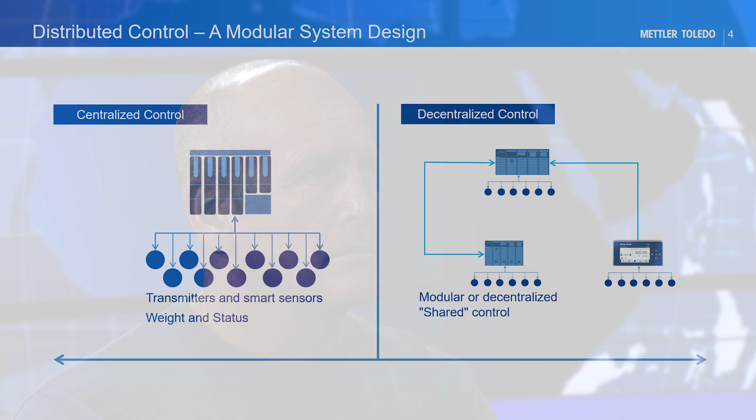Today we're here to talk about distributed control in factory automation with Bram Scheidegger. Hello Bram. Hi Jeff. What can you tell us about distributed control in factory automation? So distributed control is an architectural design pattern where you split the tasks into multiple subtasks. Okay, what's the advantage to a customer to do something like that?

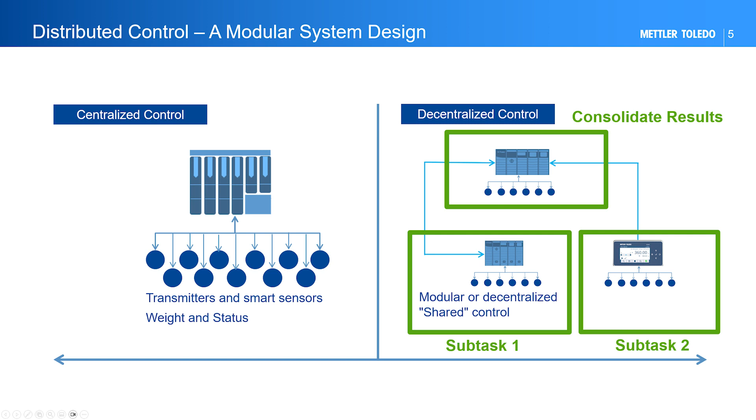Well, with that, you reduce the overall complexity because instead of one big complex problem, you split it into multiple small sub-elements and you can work on each individual sub-element independently. So for example, when you commission a system, you can commission each part separately, test each part separately, make sure it's up and running, and then connect it to the factory automation network. Okay, when you do that, does it take more engineering?

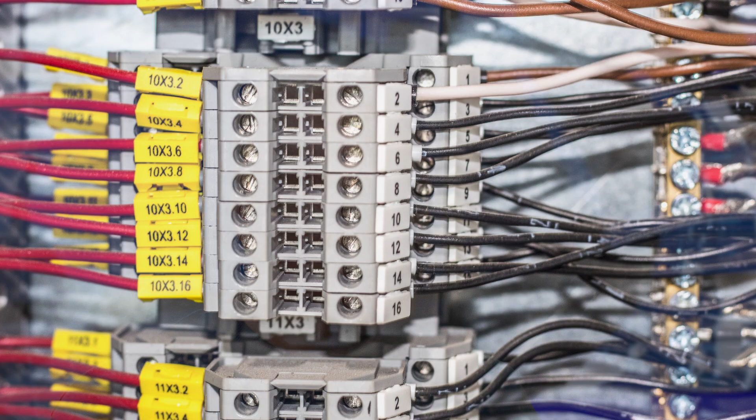No, absolutely not, because usually you can buy these local modules from a third-party manufacturer, which are experts in that field. And then you have the pre-programmed application in there, which does the job for you. And it has also another advantage. You have only one industrial Ethernet wire going there. You don't have the problem that you need to run 10 wires there and find out, if there is a problem, which wire is now broken or is it in the right place, especially if it's 100 meters away, right?

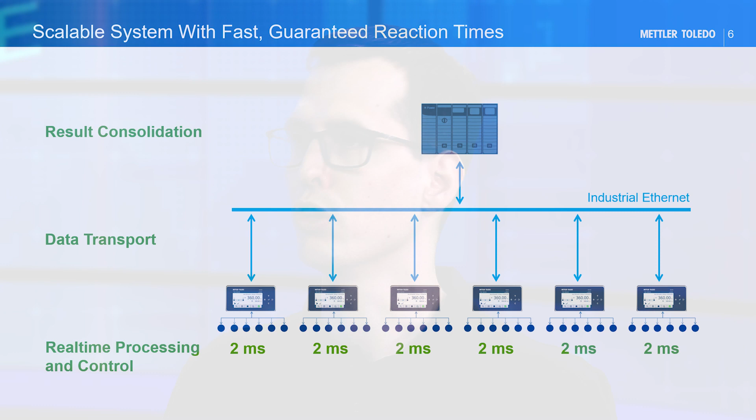Okay, so when everything breaks down and you have to fix something, you can just plug and replace or plug and produce. Yeah, or go to the machine and look at the local wiring because everything is wired there and it's an encapsulated machine. Okay, troubleshooting is a lot easier then. Troubleshooting is a lot easier, but you also get much better reaction time, and this way you can run your machines faster because that particular module is focused on a specific task, so it's only doing that. And then it sends the final result to the PLC, to the higher level system in that sense.

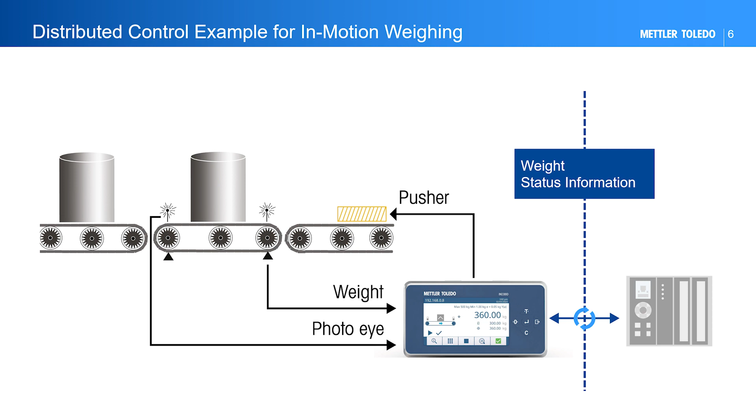Okay, can you give us a concrete example from our industry? Yeah, absolutely. So in weighing, you see a lot of examples like tank weighing, filling, or for example, in-motion weighing. When you have a conveyor belt, an inbound light barrier, an outbound light barrier, and you want to capture the weight while it's moving. There, you want to know when the item is entering, then the light barrier is triggered, and you want to know when the item is leaving, and in between you want to capture the weighment.

And this is really time critical, because I cannot wait 50 milliseconds, 100 milliseconds until I know, oh, there was an item and now I need to capture the weight. I need to know that immediately, process that and then send the final result of that item to the higher end system. So the overall controller has time to do other tasks because we're doing our specific task in a distributed control. Absolutely, yeah. So it can show the HMI, it can aggregate data, and it can control the overall factory, which needs a lot of coordination, right?

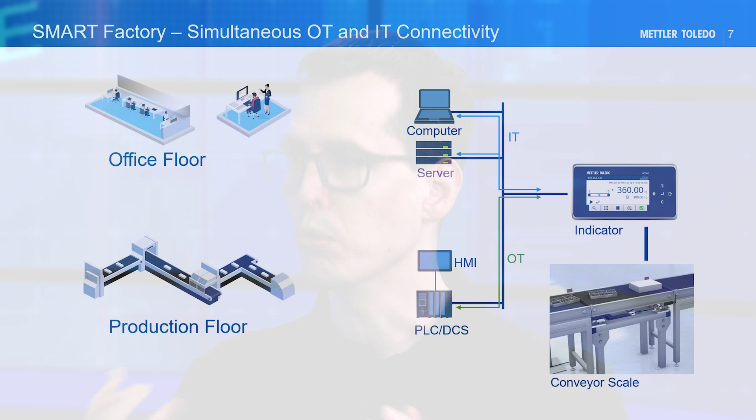Cool. Now we hear many times about smart factories, the combination of OT or automation and IT. How does this affect distributed control? Well, the distributed control architecture is very well suited to match this IT-OT convergence. I just spoke about sending data to the PLC. That's one part. So the local unit processes the data and sends the data the PLC wants to the PLC, like a weight value, status information, what it needs further downstream.

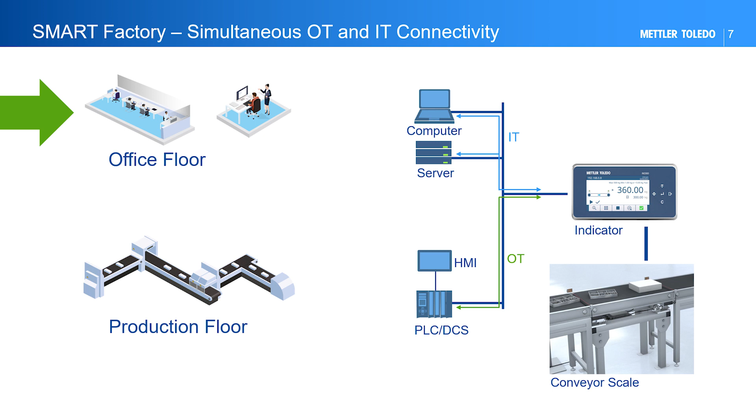Right. The IT system is interested in maybe other data points, in more data for processing. And the local unit can create from the data it captures useful information which has some meaning, and send it to the IT system, because that local unit has the domain-specific know-how about that system and can make sense of the data. Okay, that makes sense. So I have local control for the OT part of the system, and then I'm sending data out to the server or to the cloud so I can analyze the data and look for potential improvements in the process. Yeah, and the IT systems are very well equipped to have large databases and do really data crunching up there.

Oh, that's really cool. Now, sometimes I hear about distributed control systems, like DCS, a box called a DCS. Is that related to what you're talking about? It's actually a bit of a confusing naming because a DCS is actually a centralized control system. It has all the wires going in there and does all the processing by itself. You see it a lot in process industry. So it's really like a centralized control.

You can compare it with the previous IT world where we had these big mainframe systems like 20 years ago. And now the industry moved towards a more flexible distributed control mechanism. So this is a similar paradigm shift taking place now in industrial automation. So we're looking at distributed control adding the advantage of speed, lower engineering, modularity. Yeah. So these are all good reasons to move in that direction.